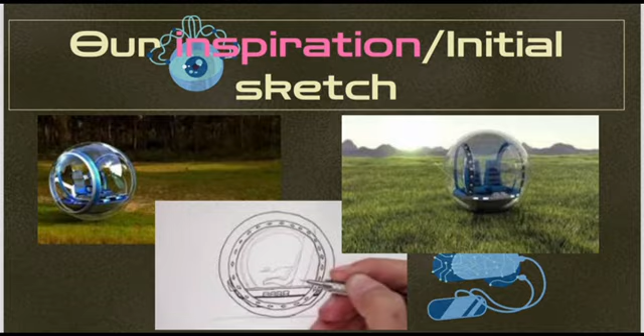Phnom Penh's traffic congestion is a serious problem that threatens the environment, public health, economy, and general quality of life in the city. After banning motorcycles and calling for solutions by the Ministry of Transportation, SkyTuk, an electric personal vehicle system, was invented to transform urban transport in Phnom Penh.

Our design idea is that SkyTuk will be made of light tracks raised above ground level along the city's existing structures so as to minimize land acquisition.

On these tracks, self-driven pods will be moving with a capacity of 2 passengers each. The system offers safety as well as efficiency since passengers can use their mobile phones to call pods, which will move from one point to another without any human interaction.

Our main purpose is that it will help free roads up from traffic jams and use vertical space. It requires less environmental degradation during construction and maintenance. It increases safety levels while removing the need for personal steering.

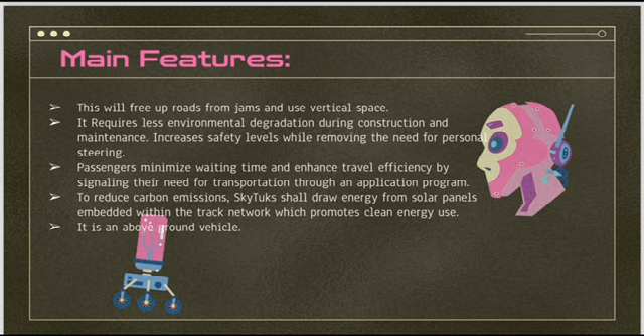Passengers can minimize waiting time and enhance travel efficiency by signaling their need for transportation through an app. To reduce carbon emissions, SkyTuk draws energy from solar panels embedded within the track network, which promotes clean energy use. It is an above-ground vehicle.

Our main features are that it can be expanded easily, is effective, and does not interfere much with the current structure of our towns. This technology does not require any human being to operate it, so cases of crashing might reduce significantly.

This vehicle cuts down the release of gases, and people no longer need to wait for buses, which might delay picking them up from points where they stay, since SkyTuks are always available whenever one needs to be taken.

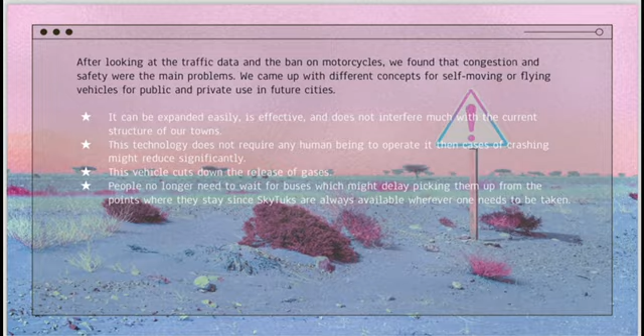Moving on to our design process, first we had to draw out the base of our model on the XY plane before we could design it. Next, we looked up circle using the create drop-down list.

We dragged and produced a circle with a diameter of 50 mm using the circle tool, much like the example image. Then, using the construct tab, we made an offset plane and positioned it 30 mm above the circle.

We then drew another circle on the plane we had just made, but this time with a diameter of 90 mm, significantly bigger than the first one. From this point, we joined the 2 circles using the loft tool, giving us a trapezoid-like circular base.

Next, we used the sphere tool in the create menu to construct a 15 mm diameter sphere. Following that, we positioned a sphere on the base we had just modeled, on the lower face.

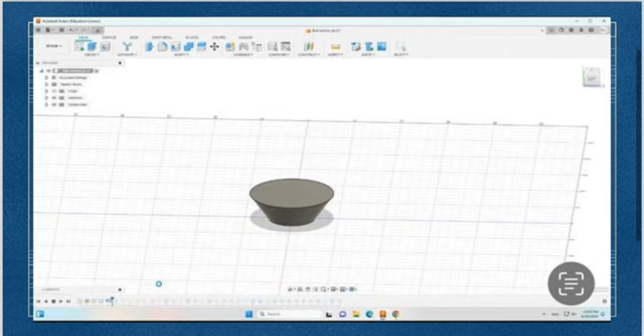We used the chamfer tool in the modify tab to better adjust our base, setting the values to 5 mm for both the circular faces' borders.

As for the structure, 3 rings will serve as the overall framework for the entire vehicle. We made another offset plane, 40 mm from its origin point to the left, in order to sketch the first ring.

We next drew 2 circles with diameters of 80 mm and 90 mm on another sketch first made on the plane. Then we extruded the surface between the drawn circles using the extrude tool.

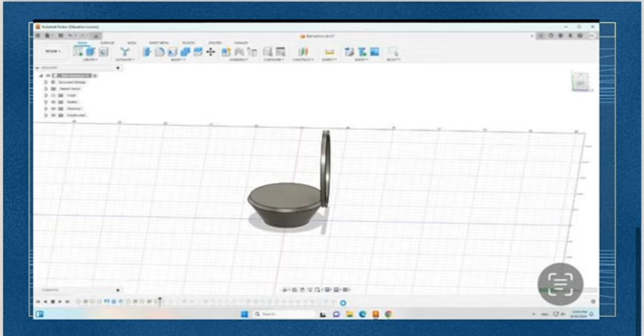5 mm was the extrude distance set. Now the shape of a conventional ring had been developed. Once more, we used the chamfer tool to polish the ring, setting both edges to 3 mm, making the edges appear more polished, like a ring.

Next, we used the move/copy tool to simply copy and paste the first ring that we had modeled onto the opposite side of the base.

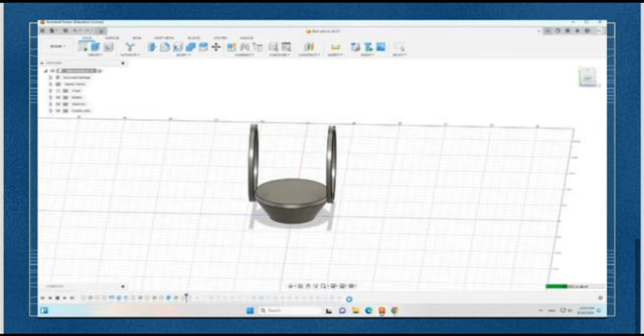We made another offset plane to draw the arc in order to model our third ring. The 2 arcs, each having a radius of 41 mm and 38 mm, were drawn correctly. And that's all for the structure.

Next, we utilized the box tool to generate another sketch on the base's face in order to depict the control stick. Then we extruded the shape to create a real 3D rectangle using the extrude tool.

Additionally, we used sketch and extrude to create a little rectangle on the rear side of the control stick. We drew and extruded some circles to incorporate them into the control stick's design by making additional doodles on the rectangle surface.

The inner circle was then extruded upward to serve as the stick. Subsequently, we drew another rectangle on the stick's surface using another sketch. We used the chamfer tool to further polish the rectangle.

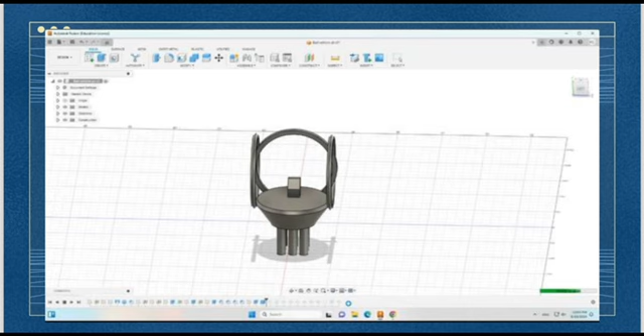As for our seats, we decided to design a simple log-shaped chair for our passengers. Using the rectangle line tool in the Create panel, we created two small rectangular sketches, one on the left and one on the right of the control area.

The seats are not directly in front of the control area because we intended it to be a self-driving vehicle, which will mainly be operating on autopilot.

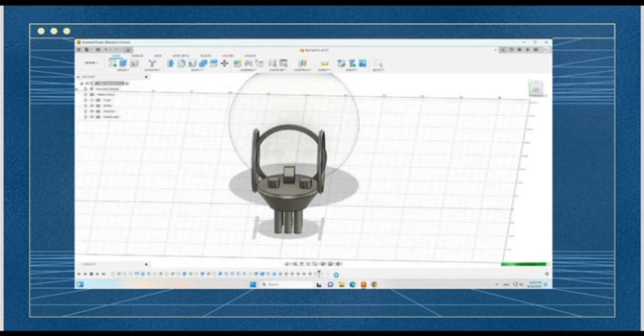Then we used the fillet tool to round every seat corner and edge for a cleaner look. Lastly, we used the extrude tool to extrude both rectangles by around 5 millimeters. And just like that, our interior is done.

Now for the exterior, which pulls our design together. Our model's final component is a glass wall that envelops the entire car. We first made a sphere and then used the shell tool to hollow it out.

This produced a hollow sphere. Then we positioned it to cover the entire vehicle after adjusting its physical substance to glass.

Using the circle feature of the create tool, we drew 9 circles in total at the base's bottom face. The circles were then extruded to resemble pipes using the extrude tool. These pipes will serve as the vehicle's combustion chamber, enabling it to soar through the air. And that'll be all for our vehicle.

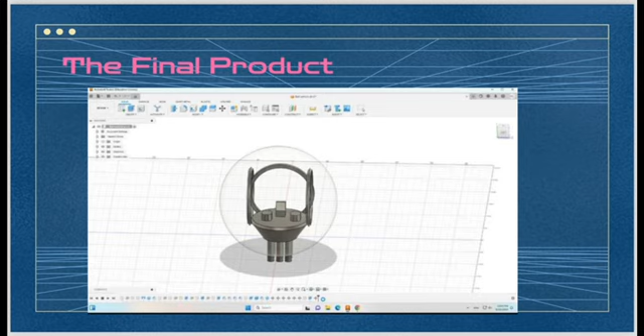And this is our time-lapse video.